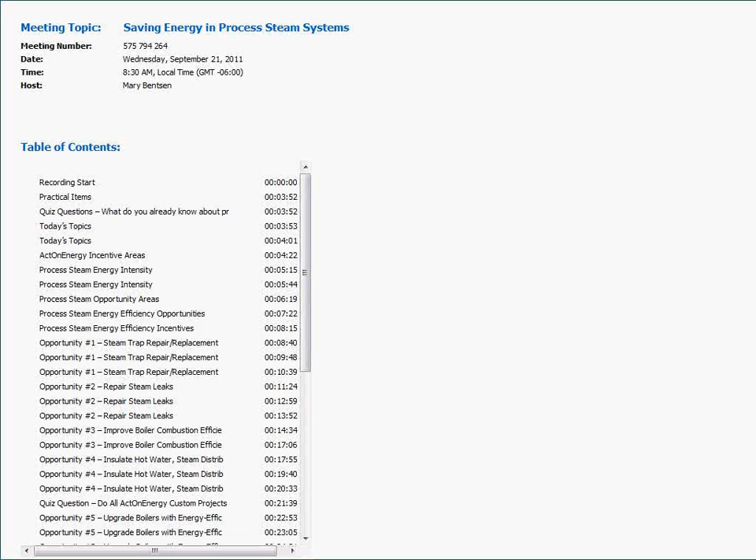Welcome to the Saving Energy in Process Steam Systems webinar. I am Mary Bentsen, and today I'm here with Robert Miller and Mark Bertram, and they'll be telling you about the process steam energy reduction projects that are supported by the Ameren Illinois ActOnEnergy program.

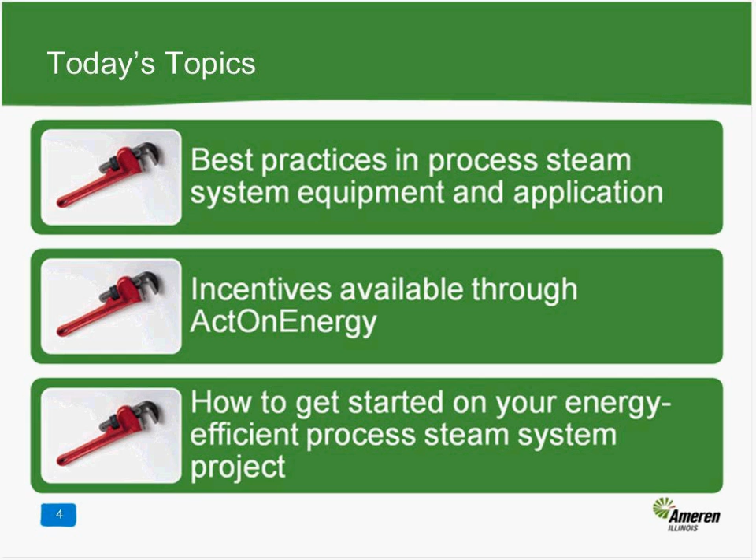Good morning, everyone. I am Robert Miller, a technical reviewer with GDS Associates Incorporated, an ActOnEnergy partner. First thing I'll do is introduce the topics we'll cover today. Today we're going to talk about best practices in process steam, the incentives available through the ActOnEnergy program, and how to get started on your project. The information presented today will help you identify process steam energy reduction projects and how to save money on your natural gas bill.

Now I'll tell you a little about the ActOnEnergy program. Ameren Illinois ActOnEnergy program offers financial incentives to customers to be more energy efficient. Energy efficient upgrades not only lower your energy bills, they can also reduce maintenance costs, improve comfort, provide precise control, and extend equipment life. The Ameren Illinois ActOnEnergy initiative helps businesses use less energy and save more money.

The ActOnEnergy programs include electric and gas incentives, where the incentive is paid to you after you complete the project. There are also energy-saving products available at the ActOnEnergy online store, where the incentive is built into the price. The online store is located at www.actonenergy.com/business online store.

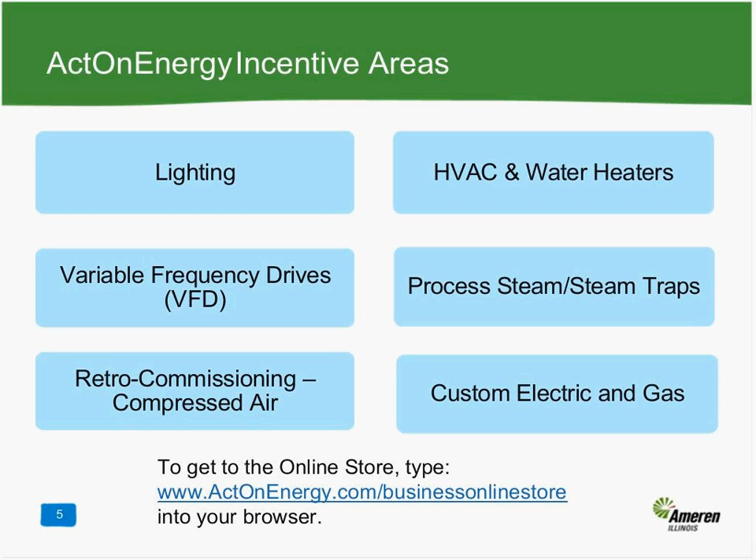Now, Mark will tell you about the process steam system opportunity areas and what incentives are available to help you with process steam system projects. Good morning, everybody. My name is Mark Bertram. I'm an engineer with GDS Associates and an ActOnEnergy partner.

Just to give you a nationwide idea of process steam and how much energy it's using nationwide, you can see here that over a third of the energy used in the country is in industrial facilities, and then a third of that energy is process steam within industrial facilities. There are opportunities when you have a steam system to be able to reduce that energy use.

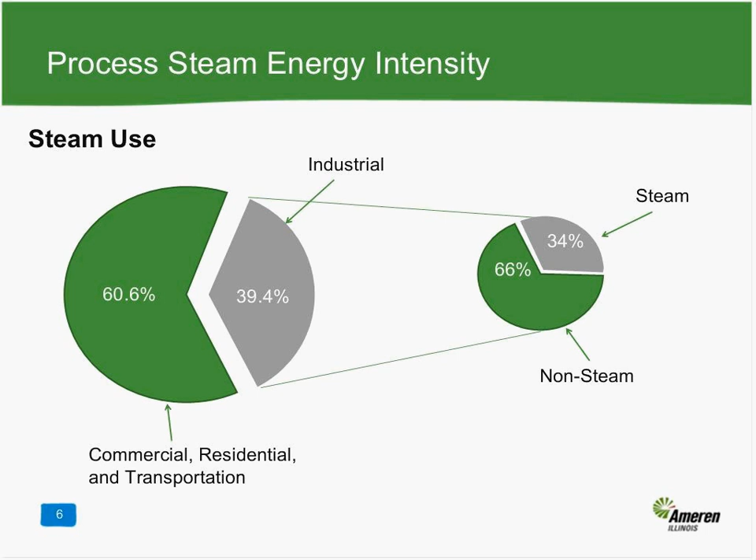So keeping this in mind, when you're able to reduce the demand side, your energy use, your steam use, that's going to bring down your whole system energy use. But there's also operations on the supply side, the production side, where we have about 30% to play with and bring that down on your energy use.

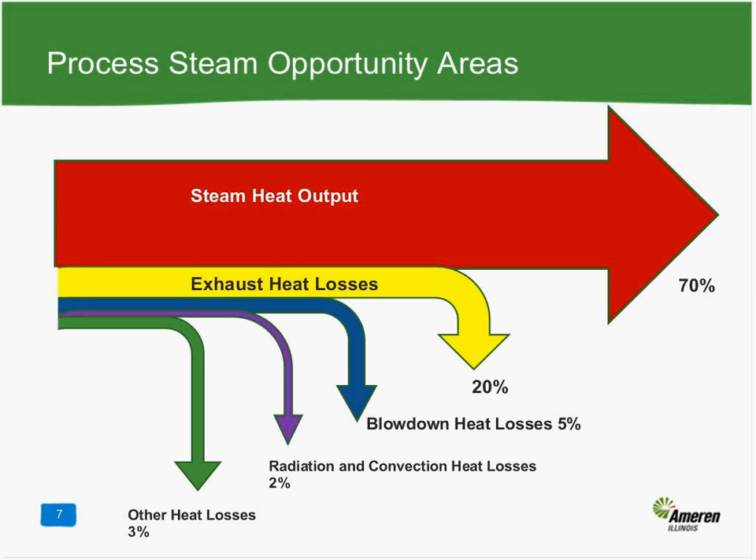Once you get outside the generation, steam systems can be broken down pretty easily into these four categories, going through the distribution and the use, and then recovery at the end. In industrial settings, there's a wide range of what the distribution systems look like, uses, and operating practices. So there's going to be very varied opportunities for process improvement and steam system improvement. Today we'll be running through a couple of these options, hopefully more globally, and specific. ActOnEnergy has incentives more specific to your process that can be utilized also.

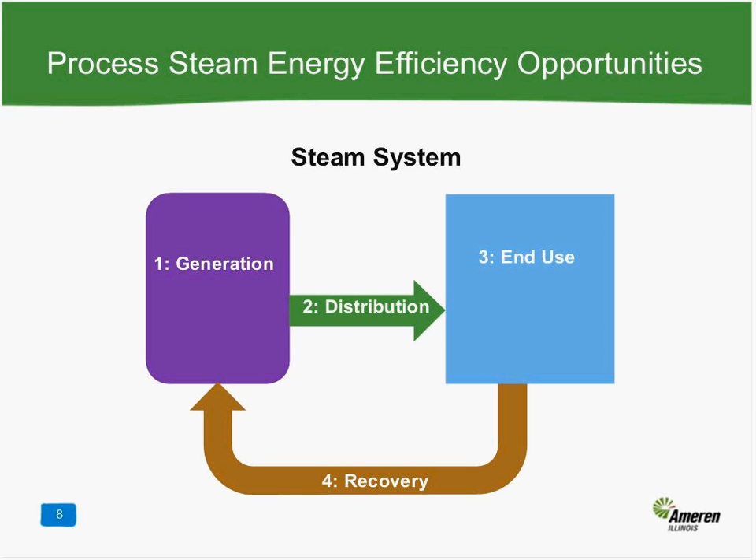So prior to jumping into individual incentives and opportunities, we'll just check to see if there's any initial questions that have come up. Mary, has anything come in? Nope, I don't have any questions so far.

Okay. Well, then we'll move ahead to the number one opportunity with nearly every steam system: steam trap repair, replacement, and monitoring to keep the system operating properly. Typically in steam systems where the traps haven't been maintained for 3 to 5 years, an assumption of 15 to 30% of the steam traps have failed. This is generally allowing live steam to escape into the condensate return system, where it's losing its energy as it comes back to the boiler, and that steam energy is not being used.

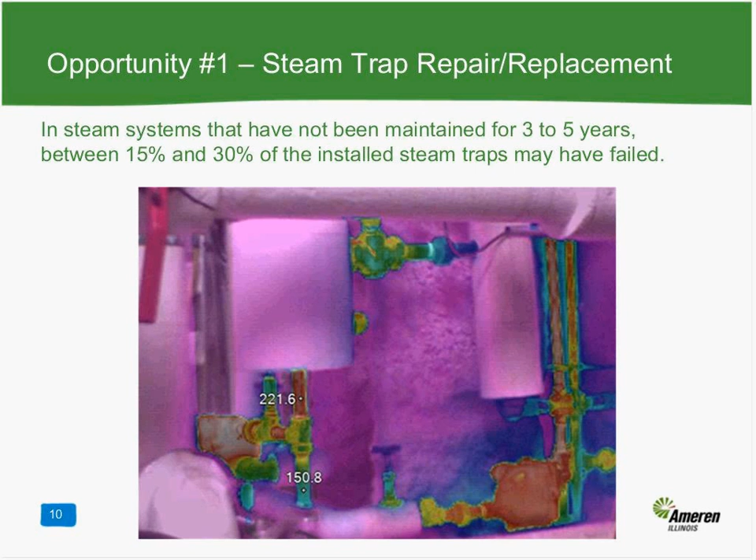In systems with a regularly scheduled maintenance program, the goal is to get the leaking traps down to less than 5% of the total population. If your steam system includes more than 500 traps or so, there's probably significant steam losses occurring throughout your system. Steam traps are tested to determine if they're functioning properly and not either cold plugging or failing in an open position where the live steam can escape.

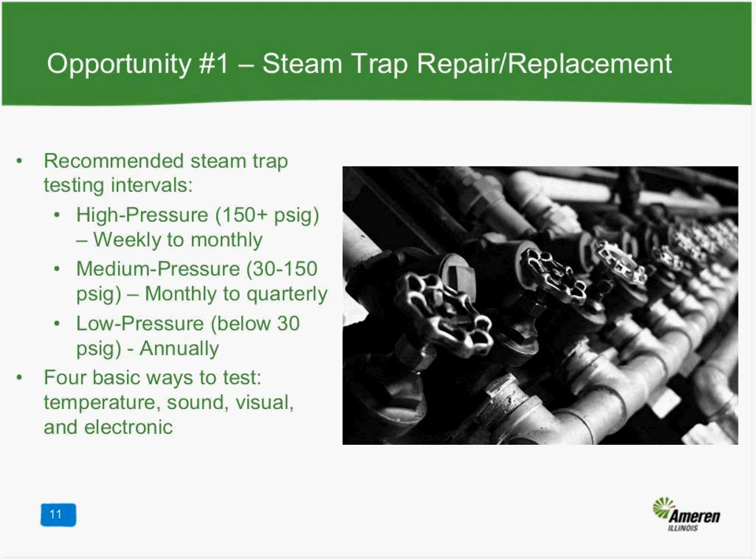Essentially, there's 4 basic ways to test steam traps: temperature, sound, visual, and electronic. Each one has its benefits, either cost-wise or detail-wise. But essentially, what you want to remember is, depending on the pressure of your steam, as you can see on the screen, the higher the pressure, the more often you want to be checking your steam traps, because the higher the pressure, the more expensive the trap failure will be.

That savings from fixing a trap can range from under $100 to several $1,000s, depending on the steam system use. ActOnEnergy also provides a range of incentives depending on your system, from $100 to $400 per trap. And typically, these measures are funded out of a facilities maintenance budget, and typical payback on the survey and fixing traps is less than 2 years.

Opportunity number 2 is repairing the leaks in the system. As steam piping components fail, be it by improper design, corrosion, and other reasons where you may end up with a leak in your system, the idea behind eliminating the steam leak is reducing the direct use of steam out of your system, where if it's leaking out the system, it's essentially using that steam up and it's not being returned back to the boiler. The makeup is completed using groundwater at 100, 200 degrees less.

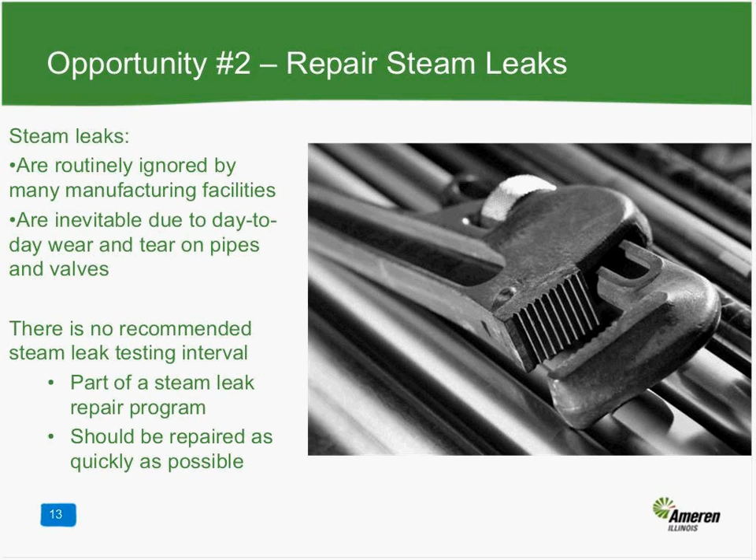Steam leaks should be repaired as quickly as possible, and we don't have a recommended steam leak testing interval, kind of an ongoing, as you see it, fix it up. Generally, the safety concern of the steam leak is a driving factor in the repair. Energy loss can just help justify the immediate maintenance and expense of the leak. Steam leaks can be identified 3 different ways, either by sound, visually, or electronically.

In some cases, larger leaks are not immediately repaired because it appears that it may be part of the typical operation. But for the most part, any leak is not a part of normal operation. So if you have something that you think may be a leak but looks like it may be normal, it's good to start asking questions and figuring that out. If you have an infrared scanner or ultrasonic equipment, that can also help you detect some smaller leaks, some things you wouldn't be able to see coming out.

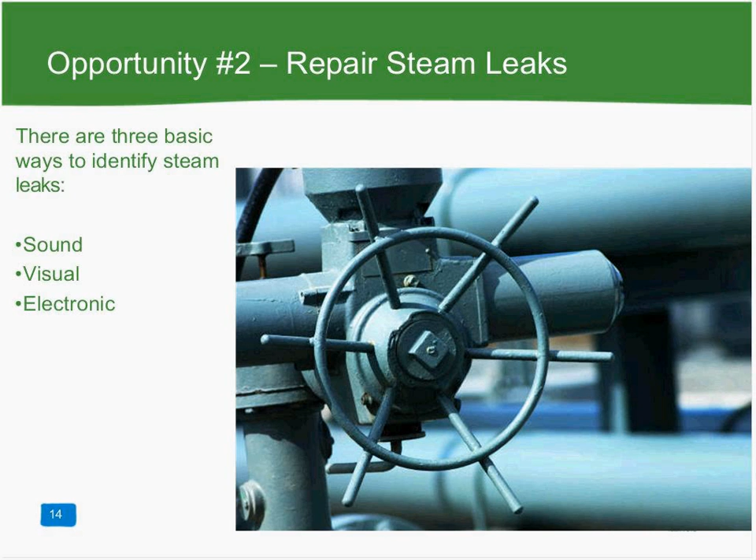Similar to failing steam traps, the annual savings varies greatly between systems, types of leaks, and the system operating procedures. It's a low-cost measure, typically out of the maintenance budget, and typically, again, it's a 2-year payback once you find the leak and can take care of it. ActOnEnergy has an incentive of $1.20 per therm, and you should use the custom application for any steam leak.

Opportunity number 3 is improving your boiler combustion efficiency. Operating your boiler with the optimum amount of excess air will minimize the heat loss up the stack and improve combustion efficiency. Boilers often operate at excess air that is higher than optimum, a lot of times for emissions to make sure those stay in line, but also because as you go below the typical center point, your efficiency drops off pretty quickly.

Combustion efficiency is a measure of how effectively the heat content of a fuel is turned into usable heat. Stack temperature and flue gas oxygen concentrations are the primary indicators of the combustion efficiency. The correct amount of excess air is determined from analyzing flue gas oxygen and carbon dioxide concentrations. Inadequate excess air results in unburned combustibles, while too much means heat is being lost up the flue gas.

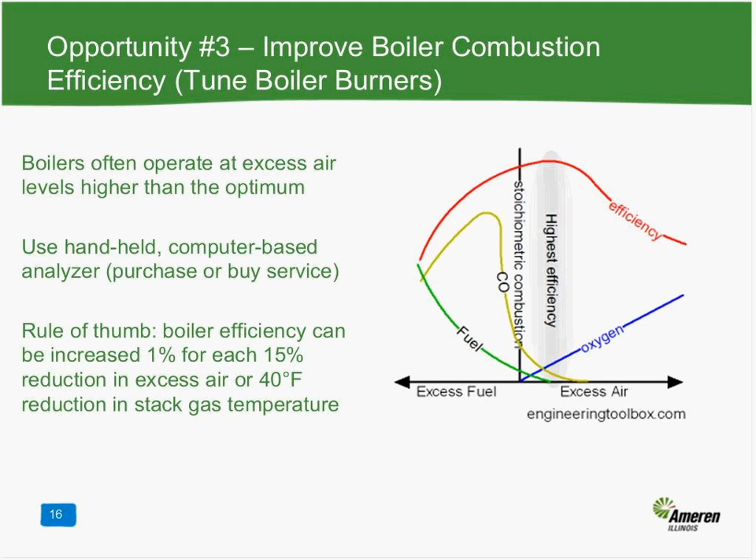Generally, if you're looking for a rule of thumb, the boiler efficiency is increased by about 1% for every 15% reduction in excess air, or 40-degree reduction in stack gas temperature. Tuning up a boiler, again, can range from several $100s to several $1,000s a year, depending on your steam production, pressure, operating hours, and the controls available to complete the tune-up. Ultimately, it's a low-cost measure, typically in a facility's maintenance budget, and again can be paid back in 2 years. The ActOnEnergy incentive is $1.20 a therm for this, and again uses a custom application.

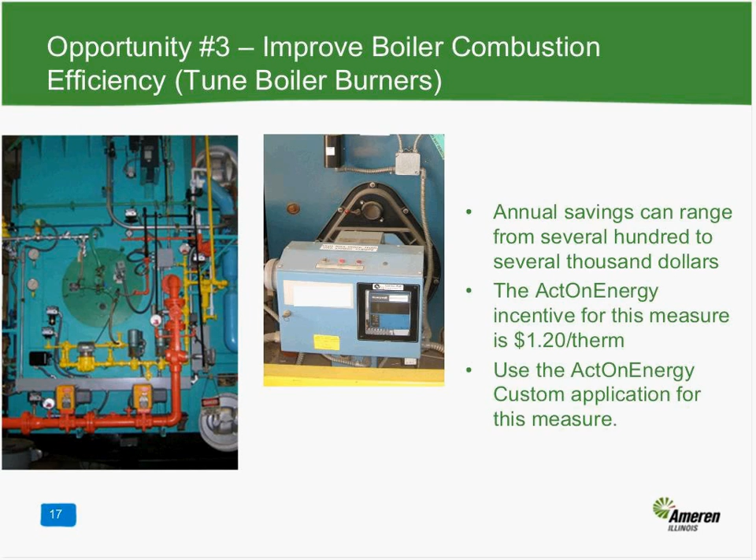Opportunity 4 is insulating your hot surfaces. Uninsulated steam distribution and condensate return lines are a constant source of wasted energy. Any source over 120 degrees should be insulated, including boiler surfaces, steam and condensate return fittings. Insulation frequently becomes damaged over time, or pipe is repaired and the insulation is never replaced. Damaged or wet insulation should be repaired immediately to avoid compromising the insulating value of the system.

Eliminating sources of moisture prior to insulation replacement eliminates the causes for wet insulation. Some other sources where your insulation may get wet are leaking valves, external pipe leaks, and leaks from adjacent equipment. Once that insulation gets wet and soggy, it really starts to deteriorate and doesn't have the same insulating value. The amount of heat loss due to inadequate insulation is a function of the surface area exposed. This is important in pipe bends, valves, flanges, traps and other fittings. A 6-inch gate valve can have more than 6 feet of surface area from which to radiate the heat.

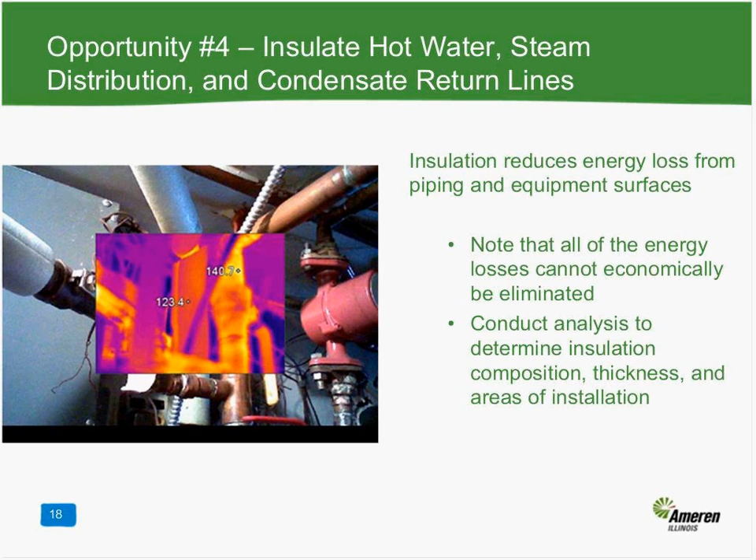If you're looking to overhaul your whole insulation system, the cost does go up. It's a medium cost measure and may require some sort of capital funding and some planning. But both smaller and larger projects can pay back in less than 2 years. ActOnEnergy has an incentive of $1.20 a therm, and you should use the ActOnEnergy custom application.

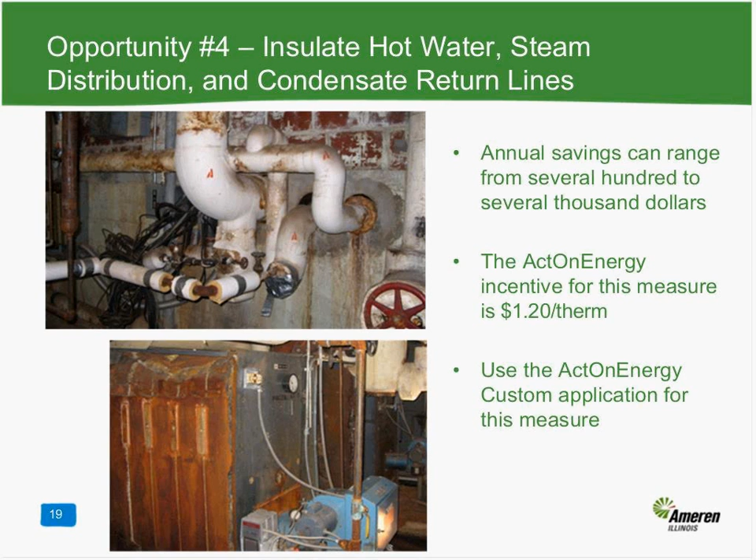Okay, now I have another quiz question for you here. Do all ActOnEnergy custom projects require pre-approval? I'm opening the poll, and you'll have just a few seconds for this one. It's a yes or no.

Okay, I'm getting ready to close the poll here. Taking just a few seconds. You'll have 3 more seconds to finish, and then I'll share the results. And here's the results. 56% said yes, and 18% said no, and 26% no answer.

The correct answer is yes. All custom projects require pre-approval. So now I'm going to turn this back over to Rob, and he's going to tell you about opportunity number 5.

Now I'm going to tell you about more capital-intensive process steam system opportunities. The first is upgrading boilers with energy-efficient burners. A boiler will run only as well as the burner performs. A poorly designed boiler with an efficient burner may perform better than a well-designed boiler with a poor burner.

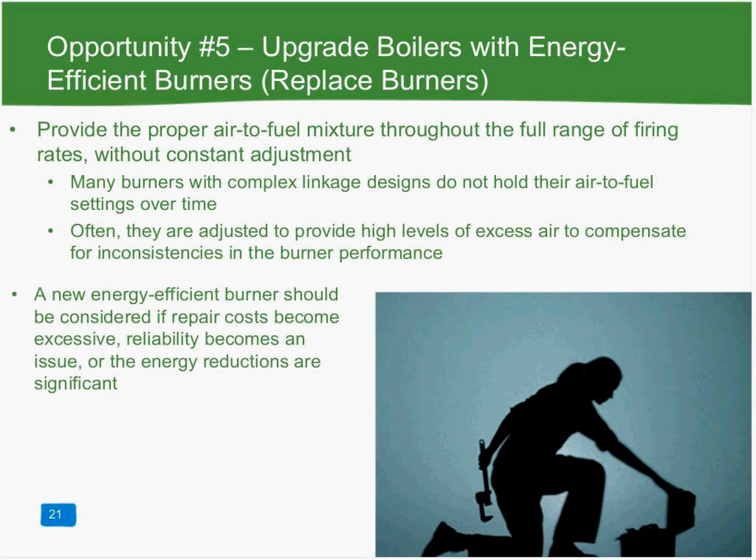First, complete recommended burner maintenance requirements and tune your boiler. Conduct combustion efficiency tests at full and part load firing rates, then compare the measured efficiency values with the performance of the new burner. Most manufacturers will provide guaranteed excess levels of oxygen, carbon monoxide, and nitrogen oxide for their burners.

Annual savings can range from several hundred to several thousand dollars, while the ActOnEnergy incentive for this measure is $1.20 per therm. This is a high-cost measure that will require capital funding. It can pay back in less than 2 years.

Okay, Rob, I do have a couple questions here for you or Mark, whoever wants to answer them. Are you ready for a couple questions? Go ahead. Okay. One person is asking, how are therm savings calculated or determined?

Therm savings can be determined by doing a calculation for your current boiler, determining its energy usage for an entire year, and then you would do a calculation for what the new burners would use for an entire year. And we understand that's going to be more of an estimate than anything. Subtract one from the other, and that's your energy reduction for the year, and then you multiply that by $1.20 per therm to figure out your incentive. Okay, thank you for that answer.

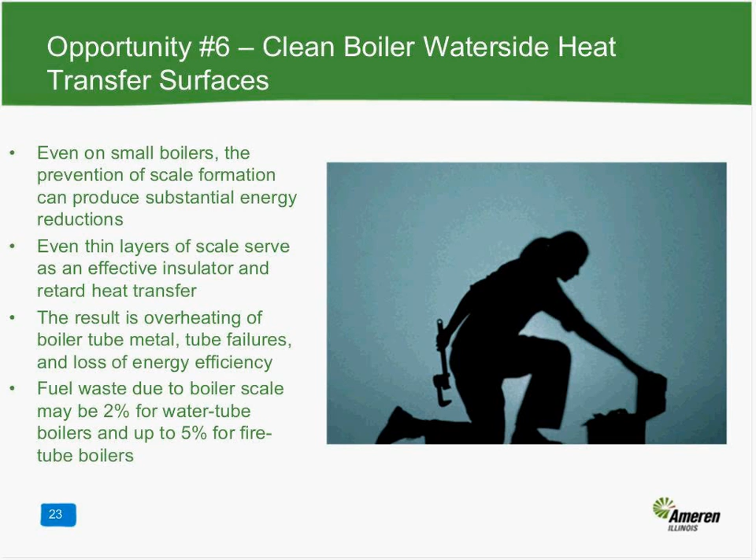Annual savings can range from several hundred to several thousand dollars, while the ActOnEnergy incentive for this measure is $1.20 per therm. For smaller projects, this is a low-cost measure that can be funded out of a facility's maintenance budget. Larger projects will require capital funding. Both smaller and larger projects can pay back in less than 2 years.

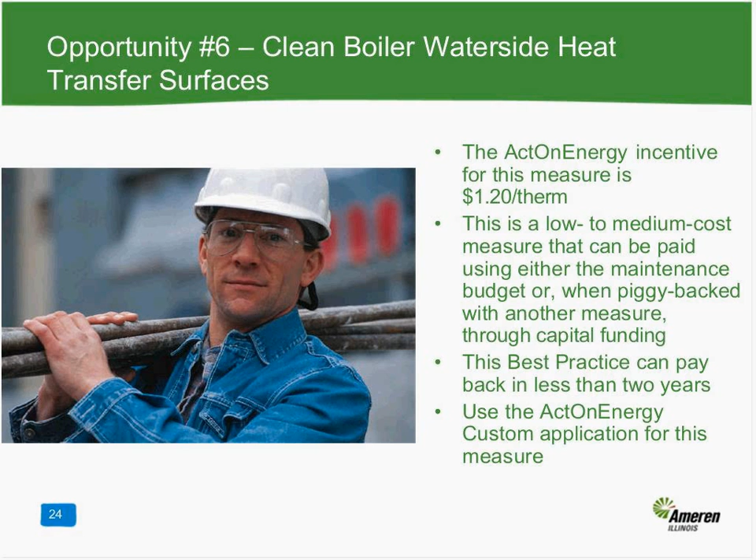Next, we are going to discuss waste heat recovery opportunities. Heat losses are unavoidable in the operation of all boilers. Air and fuel are mixed and burned to generate heat, and a portion of this heat is transferred to the boiler and then to the water to make steam. When the energy transfer reaches its practical limit, the spent combustion gases are removed, exhausted, from the boiler via a flue or stack to make room for a fresh charge of combustion gases.

At this point, the exhaust flue gases still hold considerable thermal energy. Additionally, boiler blowdown and condensate return also contain significant amounts of thermal energy. Reducing these losses should be a high priority for anyone interested in improving the energy efficiency of process steam systems. These four measures concentrate on recovering waste heat and reusing it, either at the boiler or elsewhere in the plant. Whenever possible, waste heat should be recovered. In addition to energy reductions, heat recovery also reduces water and chemical use of the boiler.

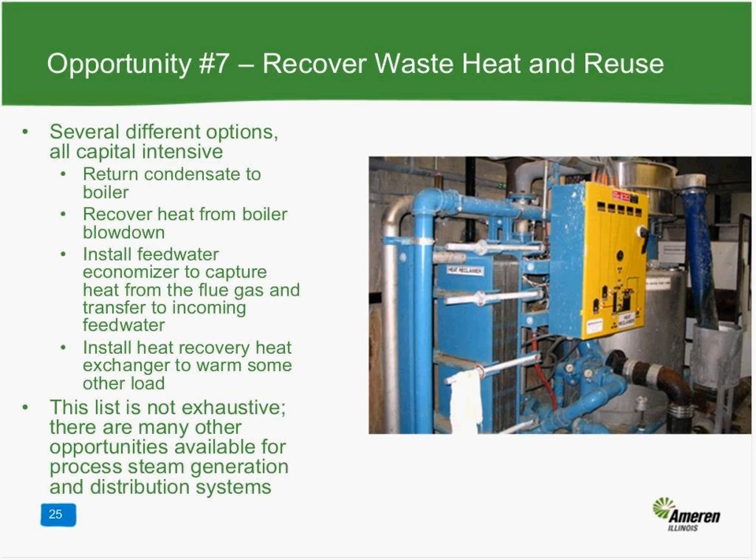Annual savings can range from several hundred to several thousand dollars, while the ActOnEnergy incentive for these measures is $1.20 a therm. These are medium to high cost measures that will require capital funding. The paybacks range widely depending on the system and usage.

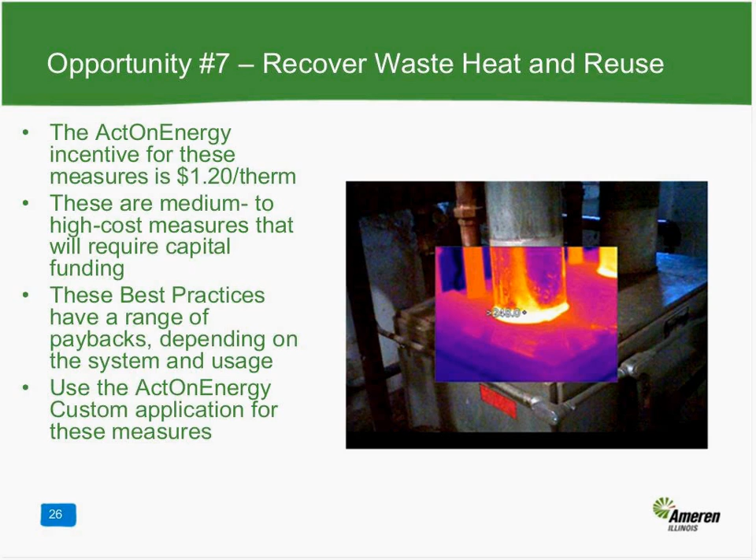Now, Mark will tell you about businesses that have completed process steam projects. All right, we have two quick case studies here today. The first is a chemical plant.

Although, there we go. Sorry, it took a second for me to get okay to move the slide forward.

First case study is a chemical plant, where some changes in the plant's processes led personnel to evaluate the feasibility of reducing a steam header pressure. Essentially, the team decided to incrementally decrease header pressure while monitoring the effects of the change on the entire system performance. Pressure was reduced twice, and each time carefully monitored to ensure there was no detrimental impact to production or system operation. The plant now operates at 100 psi, down from 125 psi prior to the change, resulting in energy savings of 8%, or an annual cost reduction of $142,000.

This chemical plant is not located in Ameren territory, but if it was, it could receive incentive dollars for the project. If it applied for ActOnEnergy incentives at today's incentive levels, they could receive an incentive for as much as 50% of the project cost under the custom gas application. That's if there were any meter points or valve replacement that needed to occur with the turn down in the pressure.

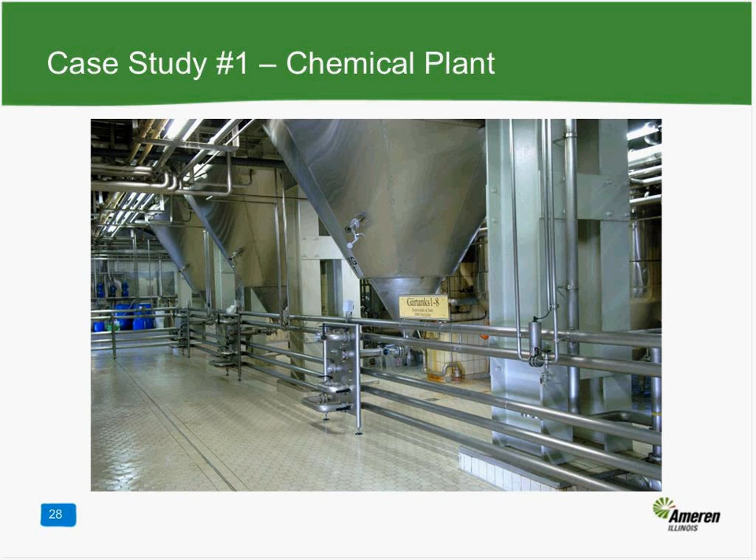A second case study involves a fertilizer plant. The following three measures were implemented at this plant that conducted an assessment of its process steam system. The plant balanced its steam load by operating a natural gas utility boiler when the plant load exceeded the capacity of the two acid plants. Under certain conditions, excess steam was vented to the atmosphere in order to maximize the sulfuric acid production. The steam could be used for process steam, and it was used to replace steam generated by the utility boilers, resulting in a 10% reduction in vented steam and reduced energy consumption by 640,000 therms per year, or $295,000.

They also completed a steam trap survey, which found that annual energy reductions of 210,000 therms, or $98,000, were feasible from repairing the plant's failed steam traps. A steam leak survey was conducted at the plant. That also indicated that repairing leaks could yield an annual reduction of 12,600 million BTU, or 126,000 therms, or nearly $60,000 of associated savings.